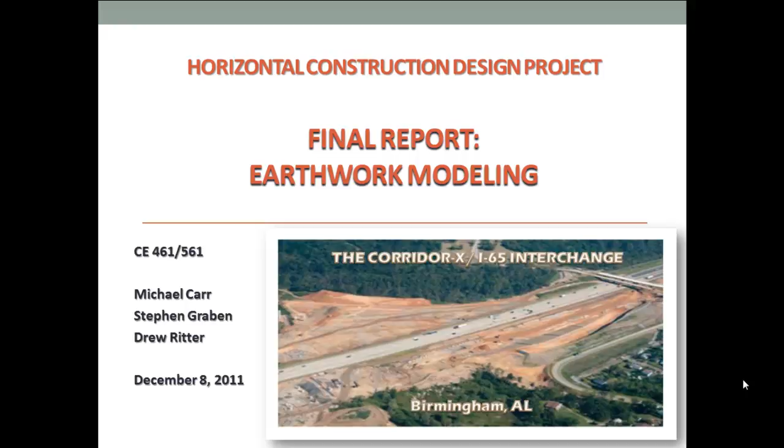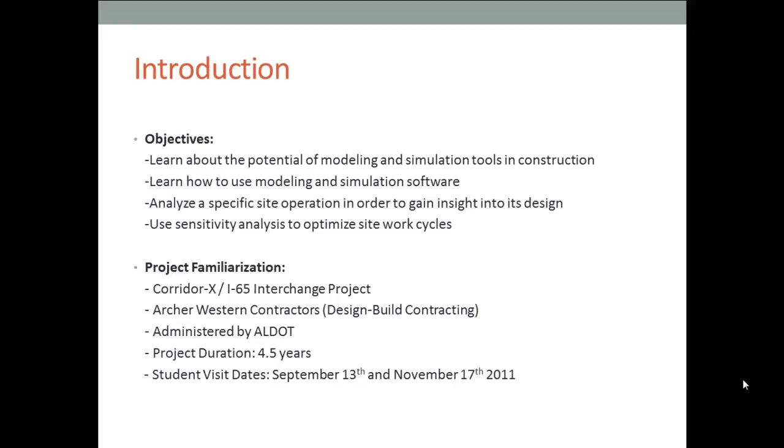Contractors on the project are Archer Western. Project duration is 4.5 years. We visited the project site on September 13th and November 17th of 2011. The project is valued at $168 million. That is the largest single contract ALDOT has ever issued out. Construction involved an enormous mountain moving operation. Project scope was to move 3.7 million cubic yards of earthwork.

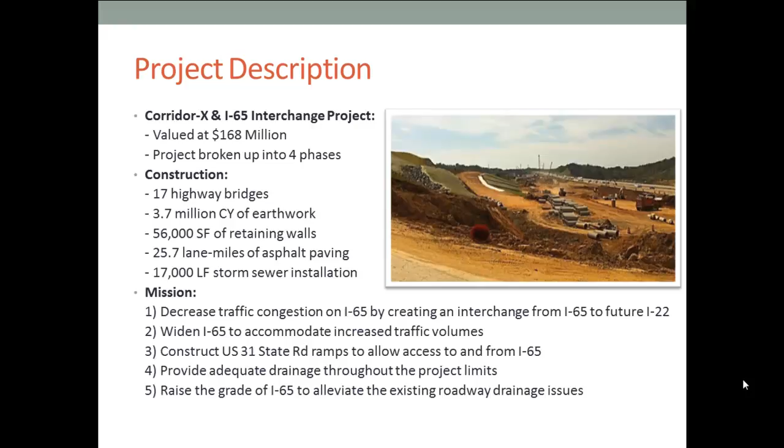One of the best things about ALDOT's mission is it will alleviate some of the traffic congestion on I-65 by creating an interchange from I-65 to the future I-22. Due to the complexity and dynamic nature of the site, we consulted with Archer Western regarding a suitable modeling activity that would be finite enough to measure, repetitive enough to statistically analyze, and flexible enough to be altered for sensitivity analysis. The design team selected an earthwork process that required cutting of an embankment, hauling a quarter-mile to fill a site, dumping, spreading soil, and finally compacting.

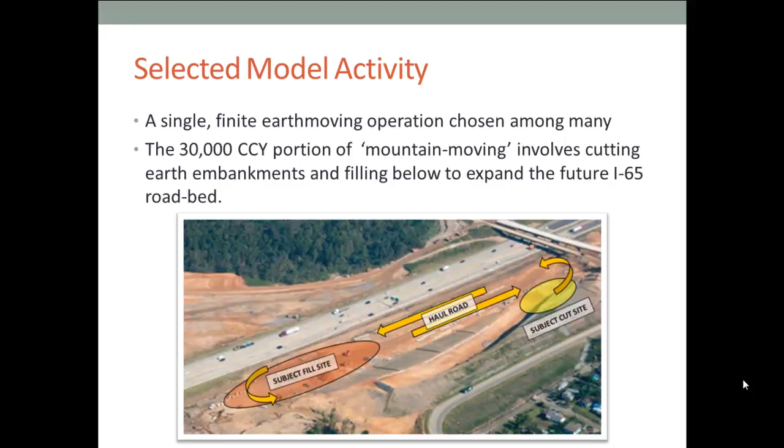The portion of earthwork under evaluation was expected to produce 30,000 compacted cubic yards. The selected process is depicted below with an aerial photograph of the project site. In order to create an appropriate model, the design team studied the earthwork process over the course of a workday. We collected equipment type, cost, and time data. We found that a Cat 349 excavator is used exclusively for loading. 2 Cat 740 off-road dump trucks are used for hauling. 2 on-highway trucks supplement the hauling process.

A Cat D6N dozer is used for spreading, and a Cat 815F pad foot roller with blade attachment is used for compaction. Equipment costs were derived from the current Federal Highway Administration allowances within the Equipment Watch's rental rate blue book. These are shown in a chart in an hourly rate. Likewise, we accumulated equipment operator costs, which for this contract are subject to Davis-Bacon wage rates. Consultation with the contractor resulted in the hourly wage provided in the bottom chart.

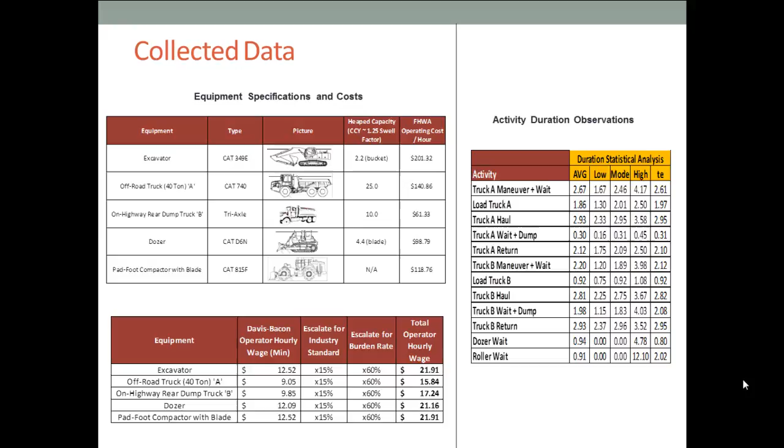The majority of time, however, was spent tracking durations of activities within the model. We logged over 20 time trials of the various activities and then performed a statistical analysis in order to provide duration input to the model. Using Microsoft Visio, enhanced by the Stroboscope add-on software, we created a flow chart of the model composed of normal activities, combi activities, queues, and flow arrows. Next, we assigned durations to activities using a triangular variable distribution from the collected data. Then, resource data was provided, and finally, applied availability constraints were also considered.

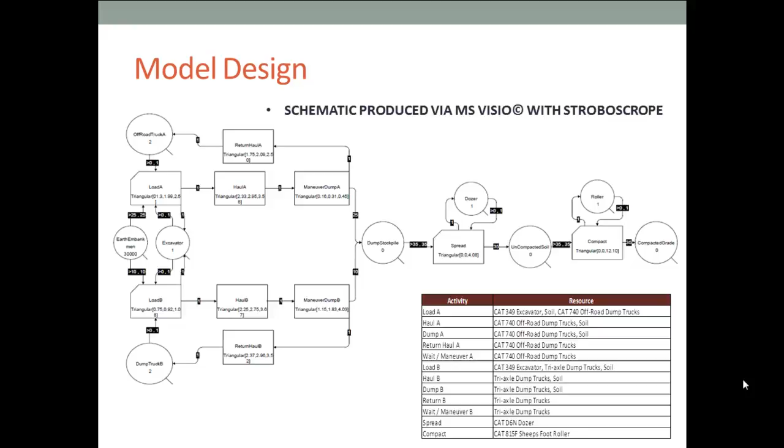A picture of our baseline model is shown. Notice the 2 competing haul cycles by on-road and off-road hauling trucks. After the baseline was created, it was executed through EZ-Strobe software. The team spent a great deal of time validating the constructed model to make sure it was a fair representation of Archer Western's current earthwork process. The parameters for validation were to, number 1, achieve the contractor's daily production rate of 5,000 cubic yards per day. And secondly, visually inspect the model to ensure field-observed constraints were imitated.

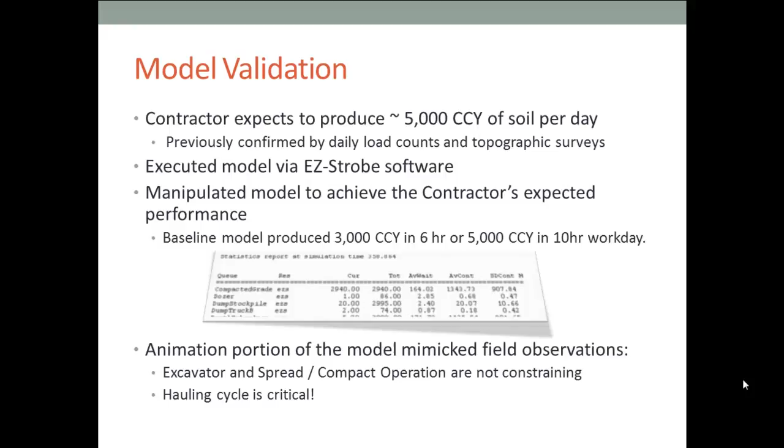After hours of manipulation, our model produced reliable results that accurately represent the contractor's daily production rate. Furthermore, we observed in the model animation that the excavator, dozer, and compactor's influence was secondary to the haul trucks, which constantly cycled while others waited. This pattern reflected reality. Although the model was sufficiently validated, we took down some notes in order to influence our final conclusions. Conducting the sensitivity analysis for process optimization would be flawed without considering these factors.

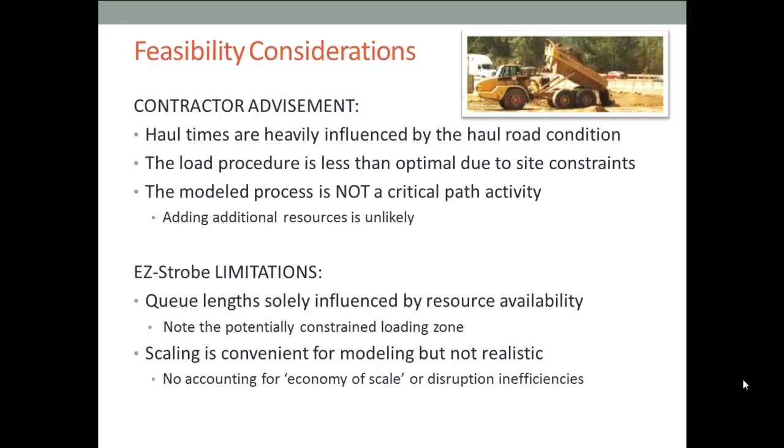Firstly, Archer Western provided some valuable input listed here, so it is valuable to know that this activity is not on the critical path. Therefore, the contractor is cost and resource conscious on the process, since other critical earth-moving operations nearby demand his first priority. Finally, there are some limitations regarding EZ-Strobe. We discovered that EZ-Strobe results were scalable, whether initiated soil quantities were 30,000 or 3,000 or 300 cubic yards. Resulting times were comparable in factors of 10. Therefore, it should be considered that EZ-Strobe does not account for economies of scale or disruption inefficiencies. This is significant in considering the contractor's vast earth-moving scope.

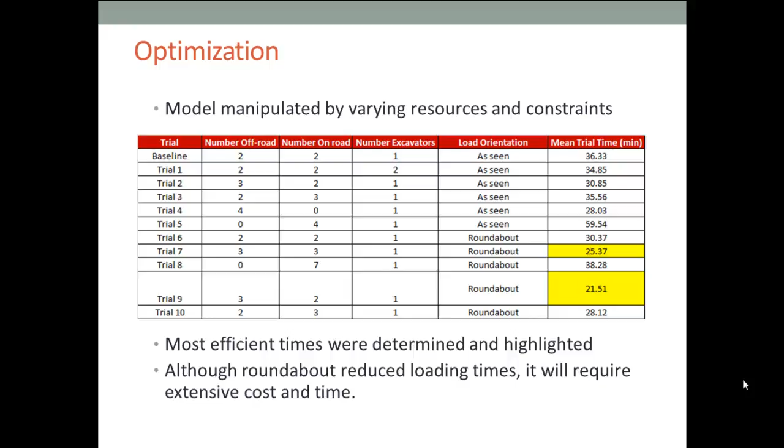By manipulating our model with varied resources and constraints at a 10% scale of the overall process, we were able to compute overall completion times. Highlighted are the two lowest overall completion times. Having these times considered, we now must secure costs for additional equipment and the construction of the roundabout. This figure represents hourly operation costs once an additional dollar amount has been factored. When additional equipment was included, a one-time mobilization cost was considered. When load orientation was varied, the design group considered a one-day construction time in which labor and equipment rates applied to the reorientation construction and not overall production.

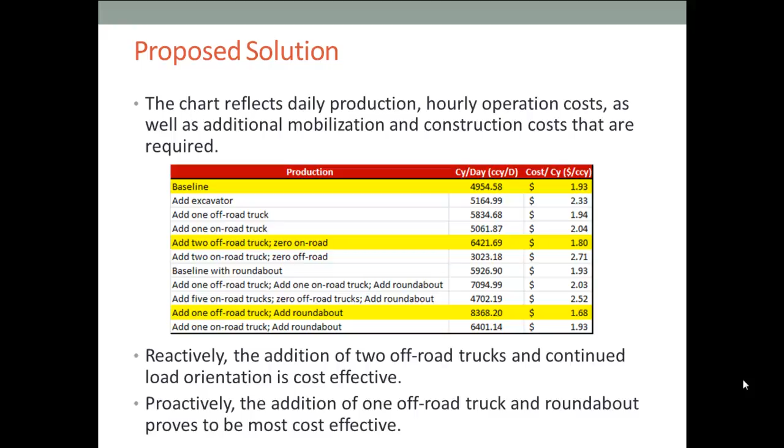From our study, the group determined that with no change in load orientation and the addition of 2 off-road trucks, efficiency was increased by 7%. The group also observed that for 1 off-road truck and the addition of a roundabout load orientation, a 15% increase in cost efficiency was realized. At this time, the group employed some critical thinking with the productivity output and cost information discussed. With a given earthwork process and already discussed feasibility considerations, the contractor might be best served by keeping the baseline process in motion. As discussed, the contractor is not afforded unlimited resources and the operation is not considered a critical path. Gains from the baseline between 7% and 15% are modest and require upfront cost to change.

However, the sensitivity analysis did offer insight regarding the most cost-wise means for future earthwork. When possible, the contractor should maximize use of off-road trucks versus on-road haulers. And when space is available, the contractor should utilize a roundabout load orientation in order to reduce load times.